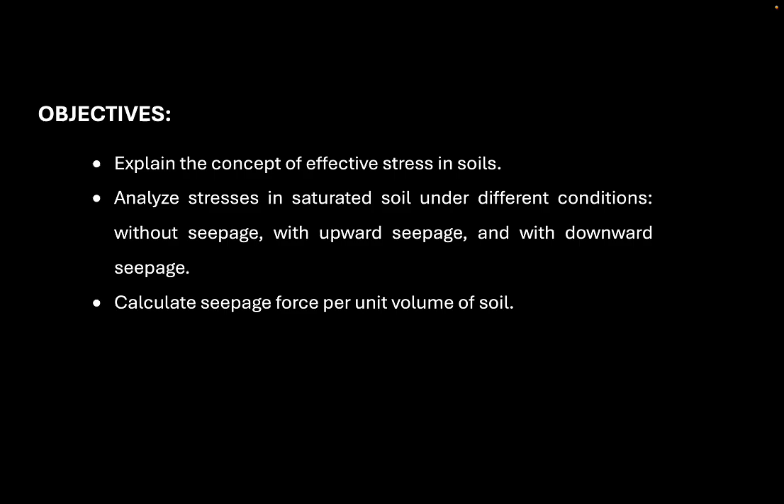Before we proceed with our discussion on effective stresses in soil, let's first know the objectives of this lesson. First is to explain the concept of effective stresses in soils. Next is to analyze the stresses in saturated soil under different conditions: without seepage, with upward seepage, and with downward seepage. Lastly, we will discuss the calculation for the seepage force per unit volume of the soil.

So to proceed, let's first define what is effective stress. Effective stress refers to the stress transmitted through the soil skeleton, which directly influences the soil strength and deformation behavior. It is also the measure of the grain-to-grain contact force per unit cross-sectional area of the soil mass.

Later on we'll see the figure illustrating this definition of effective stress as the measurement of grain-to-grain contact force per unit cross-sectional area. Also, it is the portion of the total stress carried by the soil particles, and this controls the soil strength, the settlement, and the stability. So effective stress is part of total stress.

With all this definition in hand, we can define effective stress mathematically as sigma prime equals the total stress sigma minus the neutral stress, also known as the pore water pressure U. Sigma prime is the effective stress in kilopascal, using SI units. Sigma is the total stress, also in kilopascal, and U is the pore water pressure, or neutral stress, also in kilopascal. Later on we will see why pore water pressure is also called neutral stress.

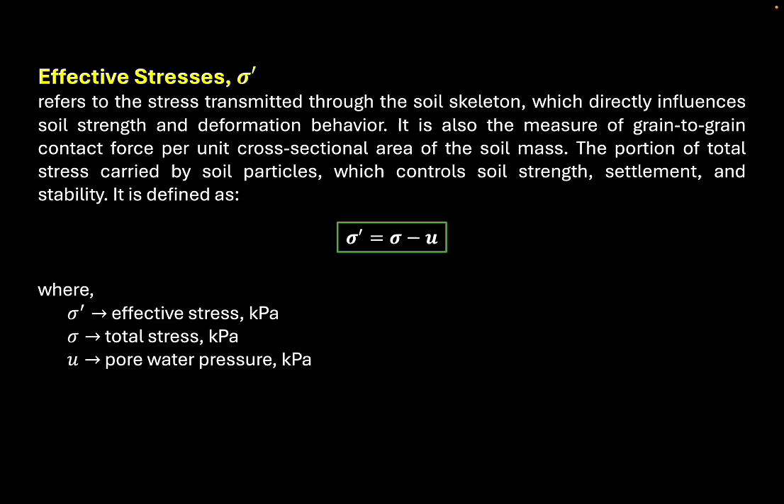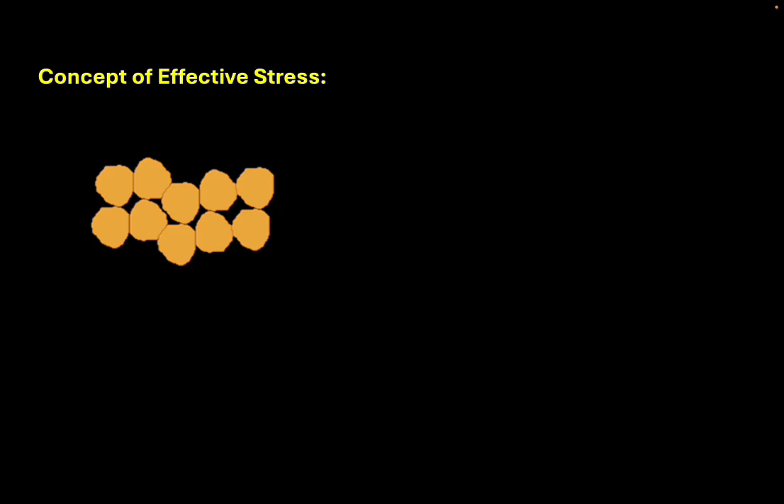For the concept of effective stress, as mentioned, based on our definition, effective stress is the measurement of grain-to-grain contact force per unit cross-sectional area. So we have here grains of soil, and we have the cross-sectional area cut into a section B to B.

If we apply forces P prime on each grain-to-grain contact of the soil, we get this type of effective stress. Each grain has its own area.

If we have a force acting downward, say force W, there are these P primes: P prime 1, P prime 2, P prime 3, P prime 4, P prime 5. This W acts on the topmost layer of our grains in consideration, and it is balanced or neutralized by these P primes from the bottom of our section.

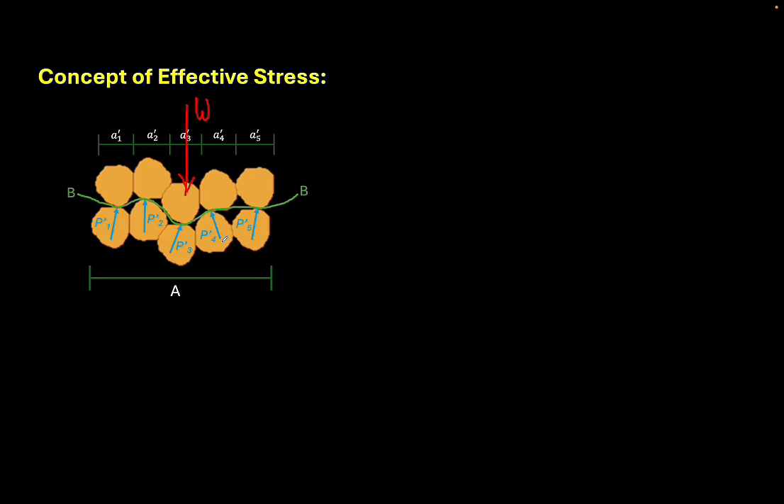We can denote this as our sigma prime, and we know from strength of materials that stress is equal to force over area. We already learned this formula for stress back in second year — it is just force over area.

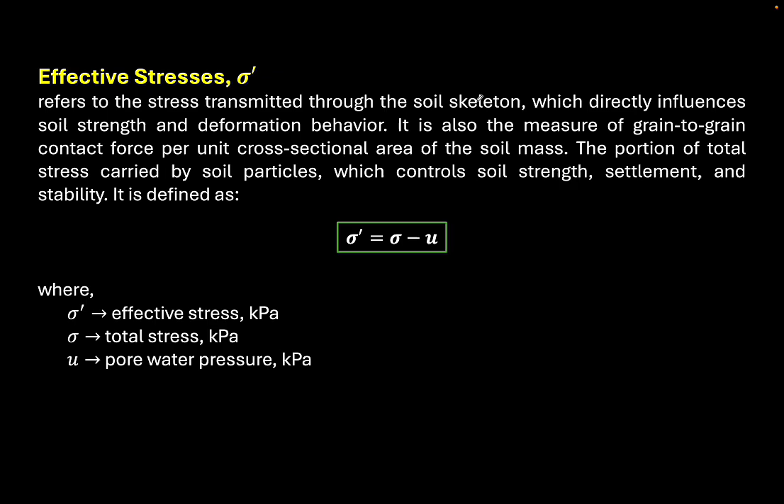Therefore we can denote sigma prime, or the effective stress, as the summation of all P primes over the unit area. That's why it matches the definition of effective stress as the grain-to-grain contact force per unit cross-sectional area — it is simply P over A.

This summation of P primes we can simply denote as P prime, or the effective force, all over the cross-sectional area. So P prime is the summation of all P primes, where i equals 1 and i is the number of contacts, and P prime acts over the grain-to-grain contact area.

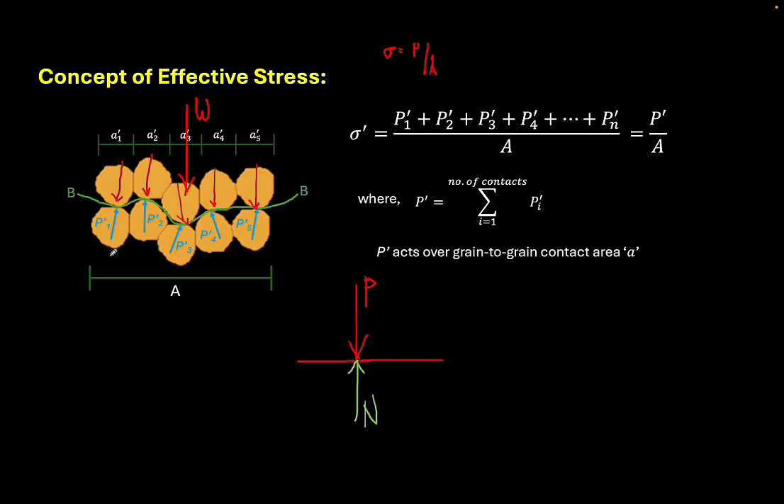It acts the same as this P prime here. So we have a force pushing down. Of course, there's a normal force that counteracts that, in which case our normal force will be P prime, okay?

So we have here an example of a water table on top and a soil column on the bottom. Our section is a B to B section. This is that section. This is our water table, and this is our soil column.

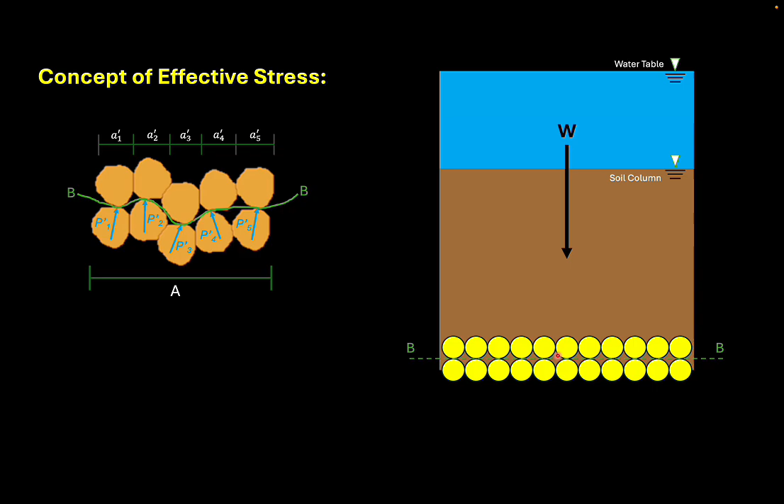Of course, in our water table, due to gravity and the weight itself—weight of the water, weight of the soil—collectively we can denote this as W. There's pressure or weight coming from our water table, and also pressure coming from our soil. And on this section, the B to B section, there's also an acting or reacting force, which is force P. So we have W.

We don't know exactly what that W is—it might be the weight of the water table, the weight of the soil, or any combination. There's also buoyancy. So we have a reacting force P to counteract that W, and that P has two parts.

First is the grain-to-grain contact force, which we discussed a while ago, that is the P prime. And another part is the buoyant force, denoted as capital U. Again, force P consists of two parts: the grain-to-grain contact force P prime and the buoyant force, capital U.

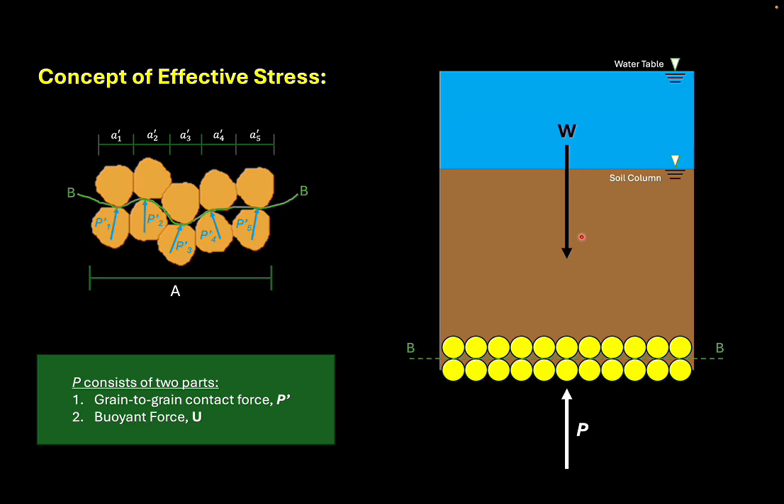Those voids, based on our soil mechanics—if the soil is dry, there's nothing inside the voids, just air. But if it's moist, there's water inside. If it's saturated, it's fully saturated with water.

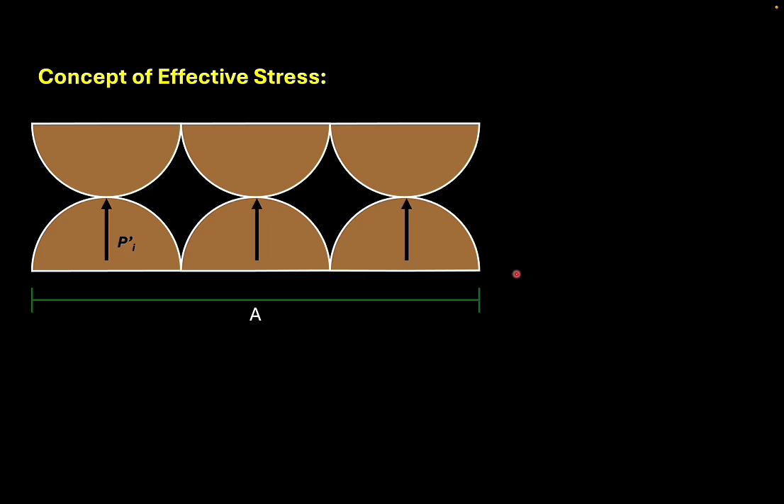Again, we have a contact force P prime along the cross-sectional area. Now let's discuss what buoyant force is, denoted as capital U. This buoyant force acts over the area of grains not in contact with each other.

That means these voids have no contact with other grains of soil. So that's where our buoyant force, capital U, is located.

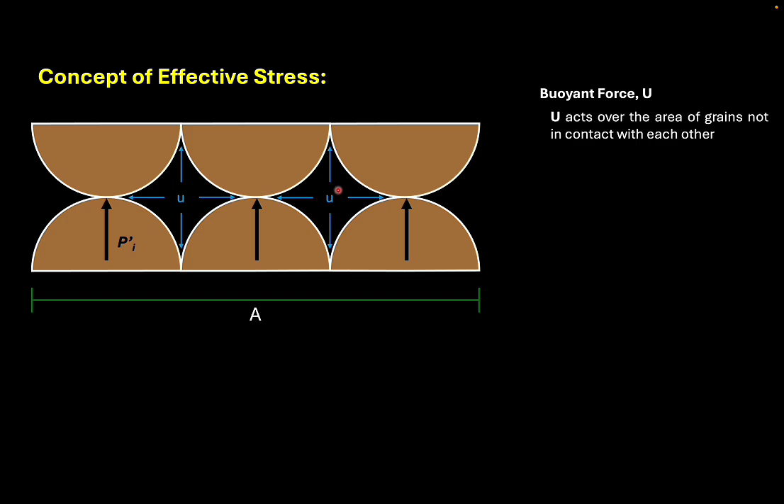But if we zoom in further on our buoyant force, we have internal forces—small forces there. That force is denoted as small u, and that small u is what we call the pore water pressure or the neutral stress.

Neutral stress—why neutral stress? We have contact forces between the grains of soil. What the neutral stress or pore water pressure does now is neutralize those grains of soil.

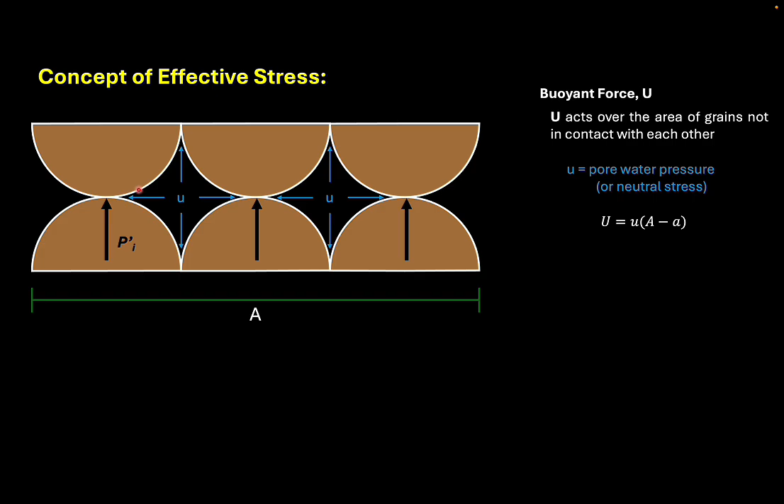So now let's discuss the effective stress equation. How was our formula for effective stress derived?

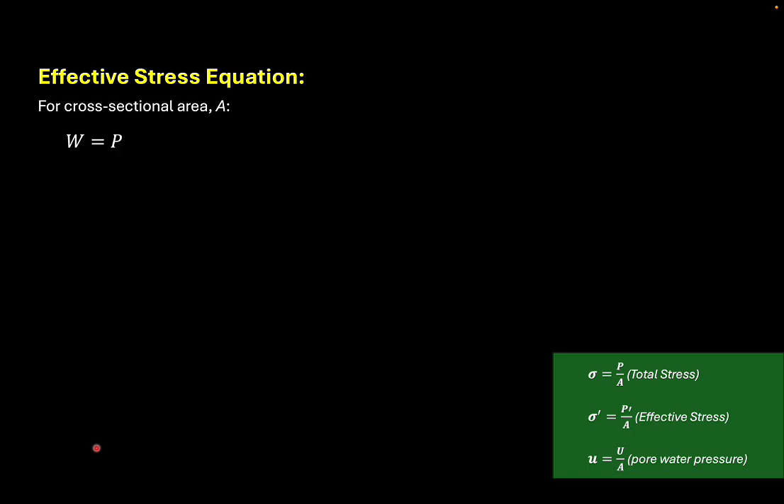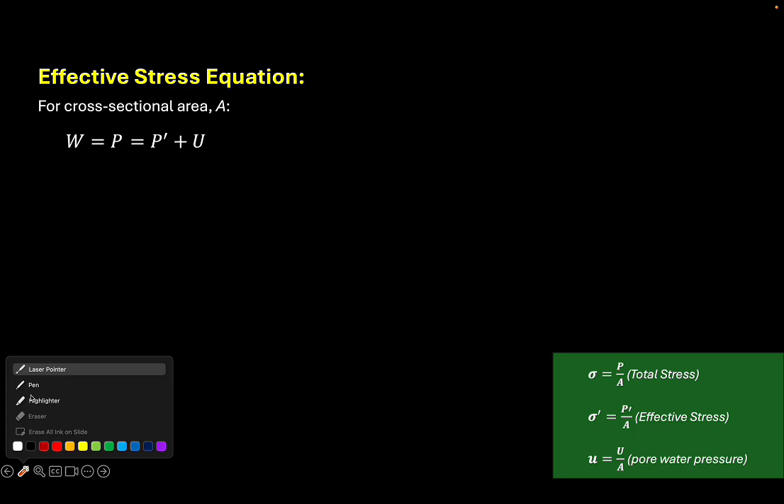From our cross-sectional area, denoted as capital A, we have W is equal to P, or weight is equal to the total force. That total force is also written as P prime, or the effective force, plus the buoyant force. Based from our discussion earlier, let's say we have a soil column, with a force going down, which is W, and a force going up, which is P. Therefore, W is equal to P, and this P can be written as P prime or the effective force plus the buoyant force.

If we divide all sides by the cross-sectional area, we become familiar with the equations we're forming. We can denote P over A, or the force over the area, as the total stress. In soil, sigma is total stress. Algebraically, this becomes P prime over A. Since P prime is the effective force, our sigma here, or stress, will be the effective stress, plus this, which is U over A.

Earlier we said the formula for the buoyant force, capital U, is equal to the pore water pressure, small u, times the area, minus the grain to grain area. That's our formula. So we substitute it, still divided by A since we divide all sides by the cross-sectional area. Algebraically, we can write this as: the total stress is equal to the effective stress plus the pore water pressure times 1 minus grain to grain area, all over the cross-sectional area of soil.

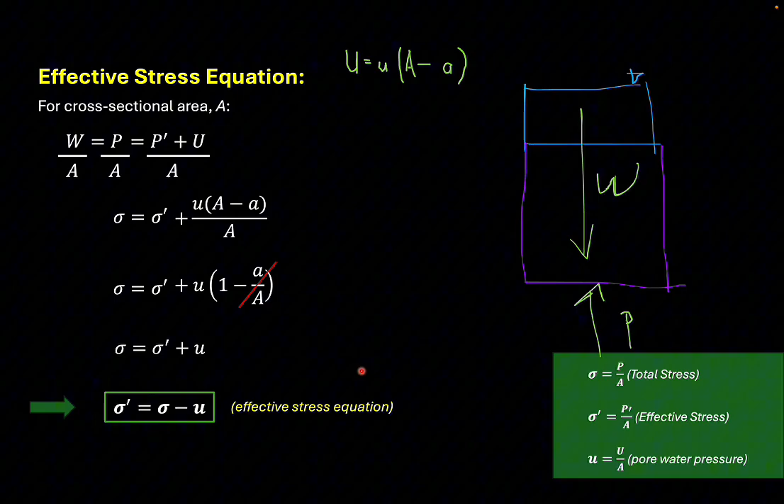So therefore, this will be the equation for our stresses. We have the total stress is equal to the effective stress plus the neutral stress. Rewriting this, we have the effective stress is equal to the total stress minus the pore water pressure, or the neutral stress. This will be our general equation for the effective stress. So now we all know the formula for the effective stress.

Let's use that equation on the following conditions. Based on our objectives, we need to know the effective stress in three conditions: no seepage, upward seepage, and downward seepage. So the first condition is the effective stress with no seepage.

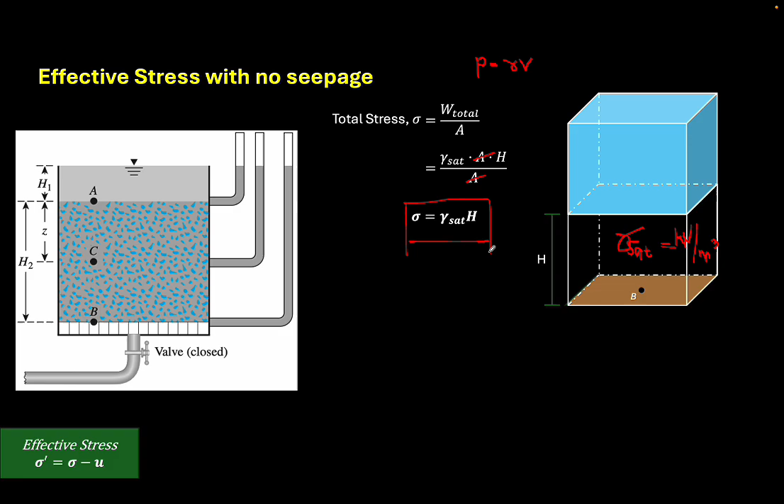Let's now proceed to getting the formulas for effective stress with no seepage. So first, total stress. The one we consider first is point A. If we consider point A, we also need to consider the soil or water above point A. In this case, at point A, what's above it is water - let's consider that, H2O, water.

So water is what we consider at point A. Isn't total stress equal to gamma sat times the depth? No problem, we have the depth. Do we have gamma sat here? At that point, again, there's no soil there. You only get gamma sat if you have soil above. Since this is purely water table at the height of H sub 1...

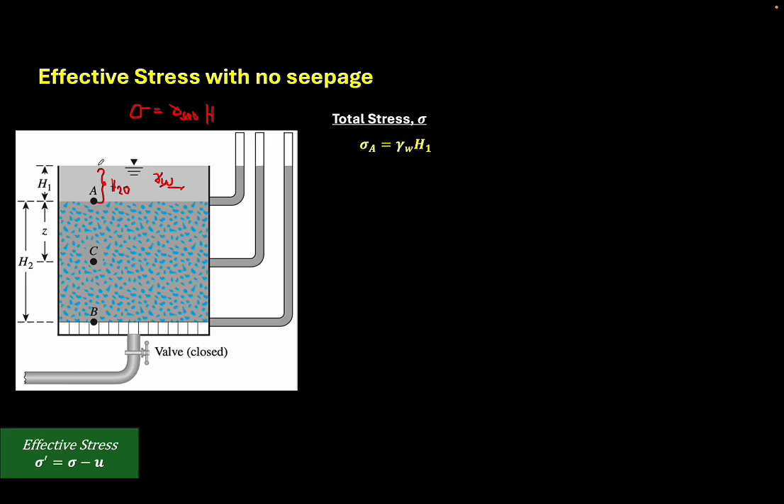...therefore we can get the total stress at point A as gamma W, or gamma of water, not gamma sat. Gamma water is what we consider at point A, because what's above it is water. So gamma water multiplied by H sub 1, or the height or depth of the water. Again, the total stress at point A, since water is above it, will be gamma W or the unit weight of water times H sub 1.

Now let's go to point B. At point B, how many types do we consider? We have two types in consideration: H sub 1 or layer 1 as the water, and layer 2 as the soil. In this case, the water table is above, above our soil. So therefore we can say that our soil below is fully saturated, so what we use here will be gamma sat, or the saturated unit weight.

Always remember that: when the water or water table is above, automatically what's below it is saturated soil, so we use the saturated unit weight. Again, effective stress is still stress, so we still use gamma H. Therefore, we can get the total stress at point B as gamma W, or the unit weight of water, times H sub 1 - that's our layer 1 - plus gamma sat, this is layer 2, or the soil layer, times H sub 2.

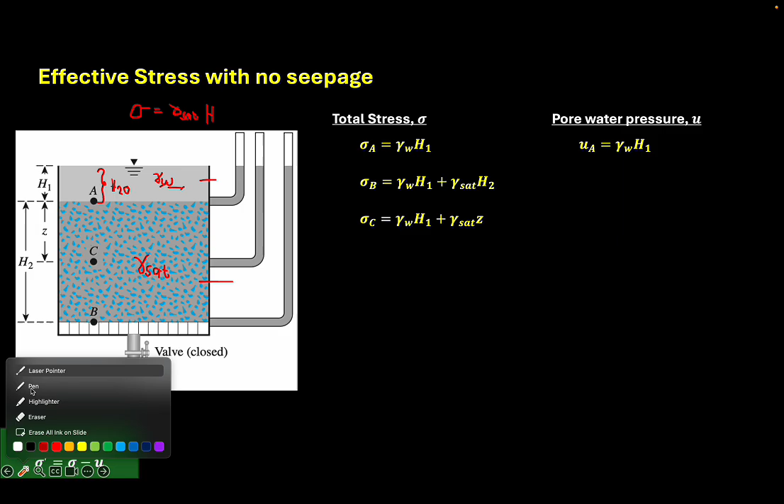How many layers do we consider acting on point B? We'll be considering 2 layers: the first layer of water, and the second layer of saturated soil. But why do we need to include the soil? Again, because our soil is saturated. We have soils that are stuck together, and in between the soils, there is water. That's why it's called saturated soil, even if it's just moist. So there's still water in between. We need to consider that too, unless there's no water inside it. We do have problems like that sometimes.

So if this layer of saturated soil is included, we can also get the pore water pressure inside this soil, since there's water in it. Therefore, UB, or the neutral stress at point B, is equal to gamma W multiplied by the depth H sub 1, plus gamma W, not gamma sat, multiplied by H sub 2. And lastly, point C, UC, is the same: we have gamma W, H sub 1, plus gamma W for the soil, times depth Z. So we have now completed the formulas for total stress and pore water pressure.

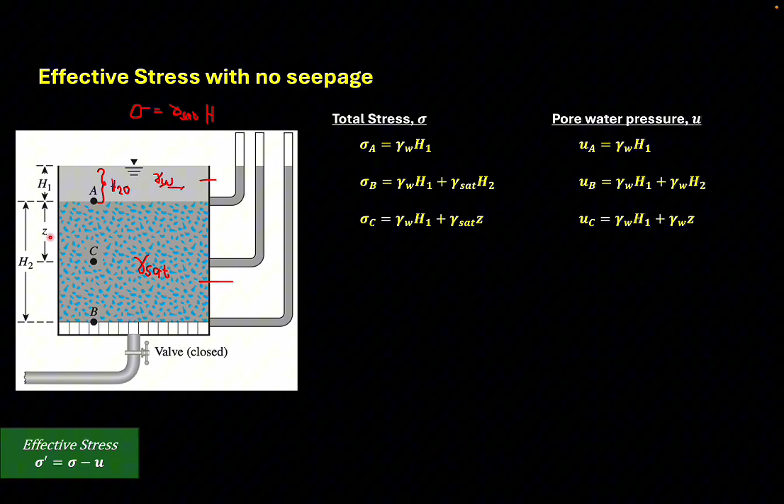So now, for the effective stress, sigma prime. We have here 3 points again: point A, point B, point C. These are the total stresses we calculated earlier, and these are the pore water pressures we calculated earlier. Based on the formula, effective stress sigma prime is equal to sigma minus pore water pressure. So we just need to subtract sigma, or the total stress, minus the pore water pressure. Gamma W H sub 1 minus gamma W H sub 1, of course, that will be 0.

If we subtract the total stress at point B and the pore water pressure at point B, we'll be having this form. We can cancel gamma W H sub 1 on both of our variables—we can cancel that out. So we can now have gamma sat H sub 2 minus gamma W H sub 2.

Labas natin yung H sub 2 since ito yung similar sa dalawang values natin. Labas natin H sub 2, so gamma sat minus gamma W times H sub 2. Very familiar sa atin yung gamma sat minus gamma W.

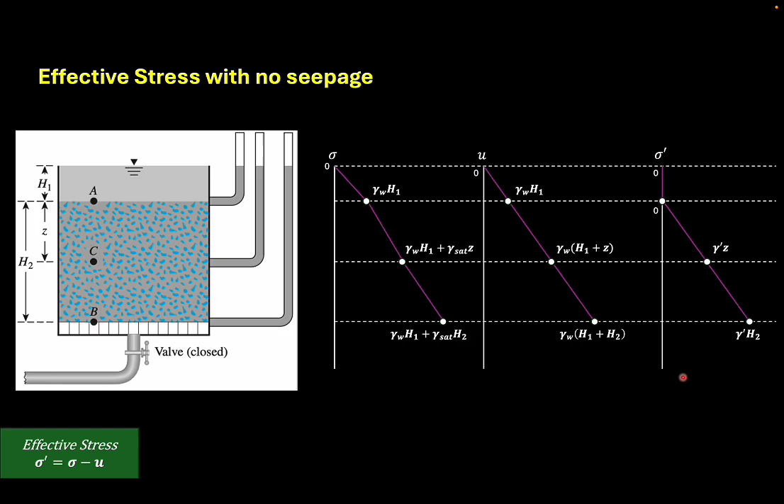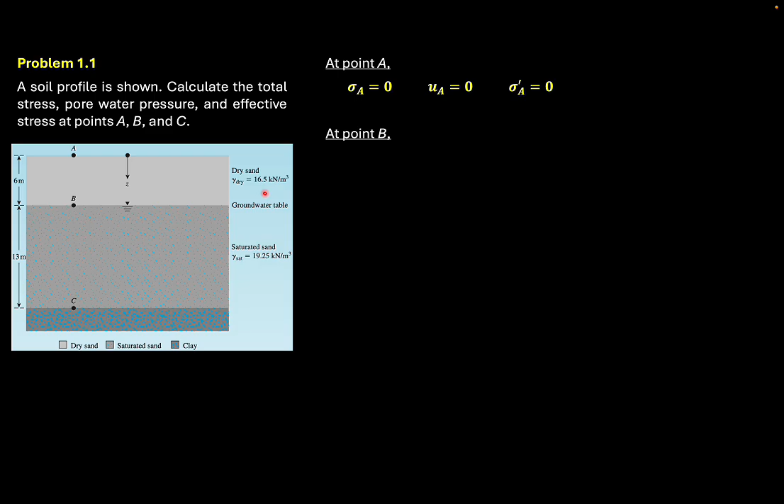So therefore, the total stress at point B is equal to gamma dry, kasi nga dry sand yan. Ang water table natin pala ay nasa ibaba ng dry sand. So, therefore, dry nga talaga yung sand natin dito, multiply by H sub 1.

Substituting the values of gamma D and H sub 1, we have 16.5 kilonewton per cubic meter multiplied by 6 meters. Calculating, we get the total stress at point B as 99 kilopascal.

Pore water pressure at point B. The soil at the top is dry sand. It has no water, no moisture at all inside. So, therefore, the pore water pressure at point B will be equal to 0.

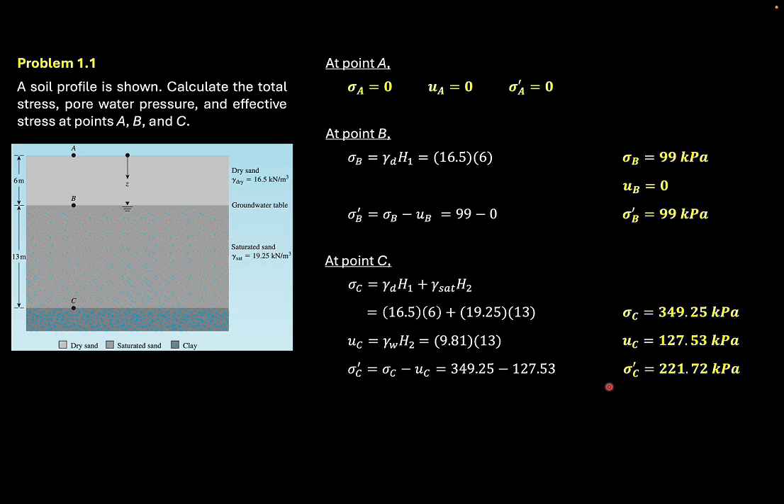So we can now compute for the effective stress at point C, which is the total stress at C minus UC, or the pore water pressure at point C. That will be 349.25 minus 127.53 kilopascals. The effective stress at point C is equal to 221.72 kilopascal. So that is for problem 1.1.

Now, problem 1.2. From the figure at problem 1.1, how high should the water table rise so that the effective stress at point C is 190 kilonewton per square meter? Assume that the gamma saturated is the same for both layers.

So, at a later time, it's possible that the groundwater table rises. We don't know the height that the water table rose. But we're given the effective stress at which the water table rose, which is 190 kilopascal. So, we need to assume that the gamma sat in the risen area and the saturated sand are equal.

So, let's follow the same procedure as before, computing layer by layer. First, let's get the total stress at point C. So, for the first layer, that will be 6 meters minus this H, to get this height.

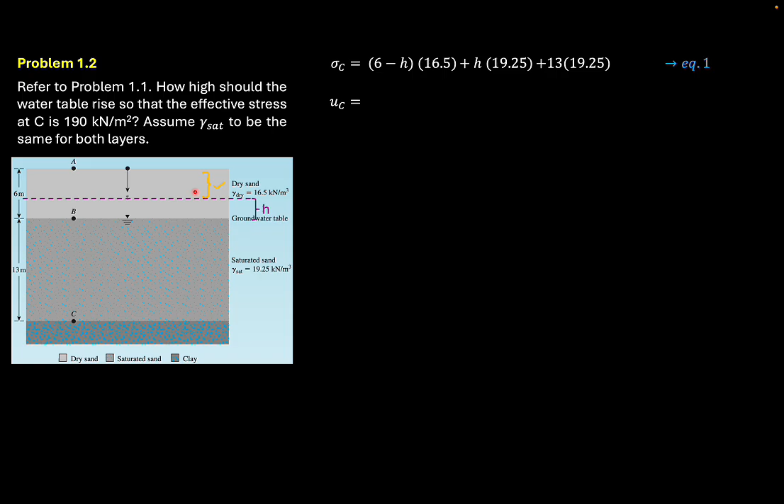At this layer, meron ba tayong gamma of water dyan? The answer is wala, because this is dry sand. Okay, dito sa 6 minus H. So dito tayo mag-i-start ngayon sa H, kasi saturated na ngayon to.

May tubig na ngayon dyan, so therefore that will be H times 9.81, ito yung gamma of water natin, plus the column 13 meters, which is the saturated sand, so that will be 13 times 9.81. And that will be our equation 2.

Again, the required effective stress at point C is equal to 190 kilopascal. And our formula for effective stress at point C is equal to the total stress at point C minus the pore water pressure at point C.

Substituting equations 1 and 2 sa ating working formula, we can have 190 equals equation 1, simplified na to, minus equation 2. So simplifying further, we can have 190 is equal to 99 minus 16.5H plus 19.25H plus 250.25 minus 9.81H minus 127.53.

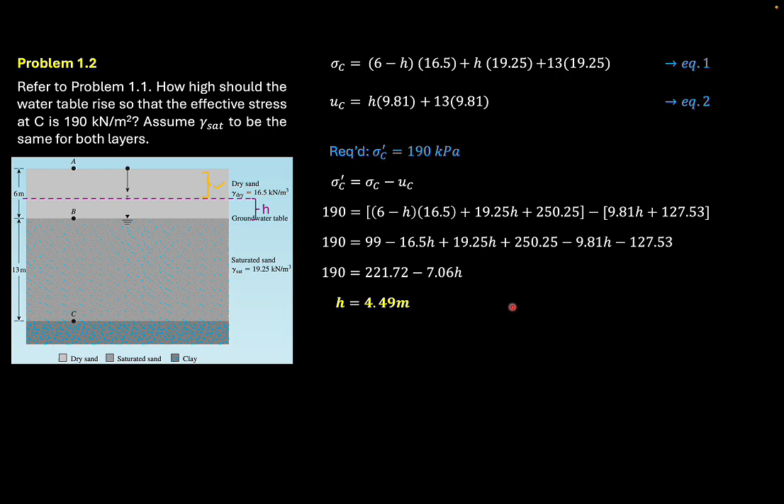Next, effective stress with upward seepage. Ito yung seepage natin, no? Ito yung tank natin, again, 2 layers of water and layer of soil. The soil natin is still saturated soil.

May pipe pa rin tayo dito. Yung pipe natin sa ibaba ngayon ay naka-open, yung valve naka-open siya. Wala naman tumatagas pababa, pero may pumapasok daw na tubig or inflow from the pipe paakyat ng soil sample natin. Okay, that's why itong force na to, ito yung upward seepage.

Galing daw sa baba yung tubig, pataas daw siya. Ang tendency ngayon ng tubig natin sa water table natin ay mag-overflow. So that's the problem with upward seepage, no?

May inflow ka galing sa ilalim, so pinupush niya pataas yung tubig, kailangan may kawalan yung tubig, kailangan niya makapasok doon sa water table. Pero ang water table natin is limited lang yung height at height h sub 1. Mag-overflow ngayon or mag-spill ngayon yung tubig natin sa ating water table.

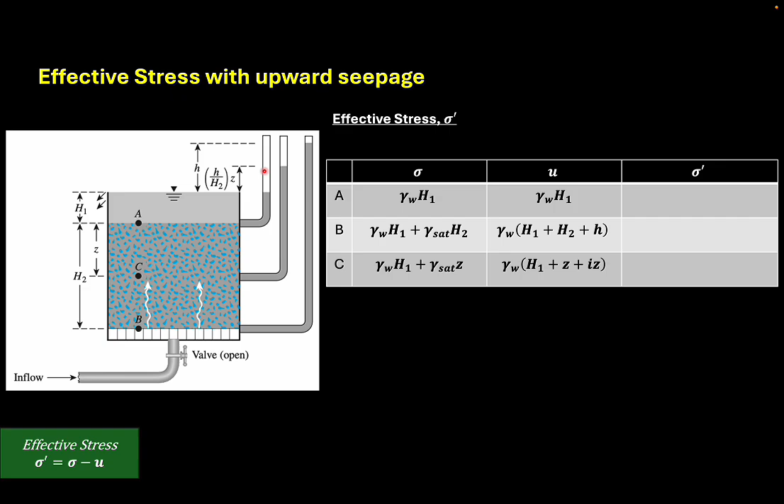Effective stress tayo, same pa rin formula. Effective stress is equal to total stress minus the pore water pressure. So for point A, effective stress at point A is equal to gamma W H sub 1 minus gamma W H sub 1. That will be equal to 0.

Next, at point B, subtracting the total stress at point B and the pore water pressure at point B, we can have this equation. Okay, cancel yung gamma W H sub 1. We can have gamma sat H sub 2 minus gamma W H sub 2 minus gamma W times H. Simplifying, again we have gamma sat minus gamma W, we can change it as gamma prime. The effective stress at point B will be gamma prime H sub 2 minus gamma W times H.

Lastly, effective stress at point C. Subtracting total stress at point C by the pore water pressure at point C. Cancel din yung gamma W H sub 1. We can have this equation: gamma sat Z minus gamma W Z minus gamma W I Z. Again, we have gamma sat minus gamma W, gamma prime yon. So therefore, we can have gamma prime Z minus gamma W I Z.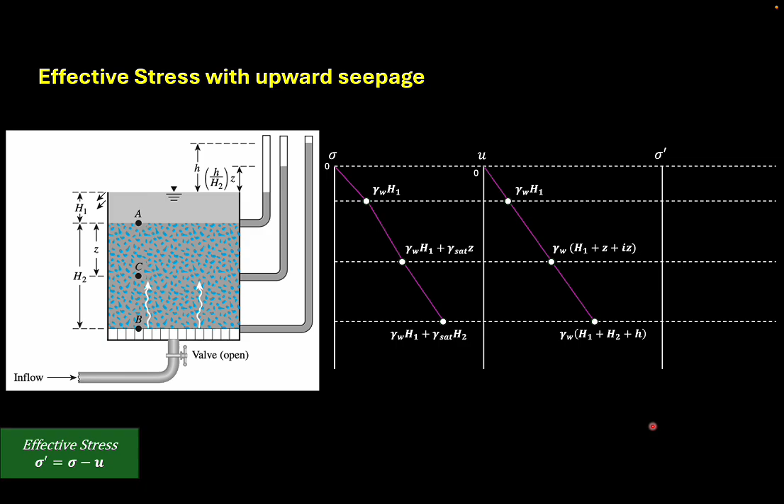Okay, so these are the procedures for the effective stress with upward seepage. If we plot our stresses, we can have this one for the total stress, for the pore water pressure, and for the effective stress.

Another principle is what we call the quick or boiling condition. If the rate of seepage and the hydraulic gradient gradually increase, a limiting condition will be reached, at which point our total stress, the effective stress, which we know is equal to gamma prime Z, kung i-consider natin ay yung point C, gamma prime Z minus gamma W I Z, yung hydraulic gradient natin will now be the critical hydraulic gradient, magiging ICR na siya, or I critical. And that effective stress at point C, or point of consideration, will be equal to 0. Again, if we are considering the critical hydraulic gradient, effective stress must be equal to 0.

Now, the ICR, or the critical hydraulic gradient, has this formula: I sub CR is equal to gamma prime all over gamma W. Again, critical hydraulic gradient is equal to the submerged unit weight, or gamma prime, all over the unit weight of the water. For most soils, the critical hydraulic gradient varies from 0.9 to 1.1, with an average of 1.

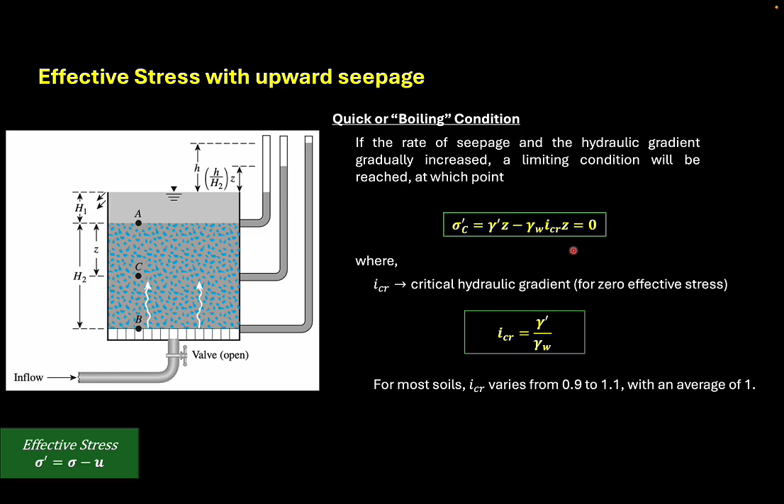Usually 1. So for example, for upward seepage and also boiling condition: Problem 1.3. A 9-meter thick layer of stiff saturated clay is underlain by a layer of sand. The sand is under artesian pressure. Calculate the maximum depth of cut H, itong H na to, that can be made in the clay.

Again, a 9-meter thick layer of stiff saturated clay is underlain by a layer of sand. The sand is under artesian pressure. Calculate the maximum depth of cut H that can be made in the clay. We cut down, but we don't know up to where. We cut it to its maximum depth where it won't fail, where it won't heave.

Now, how do we compute this problem? Let's get the total stress or the stresses at point A. The total stress at point A is equal to, since this is saturated soil, gamma sat multiplied by the height. What height will we use? Of course, 9 minus H, since that's where it is.

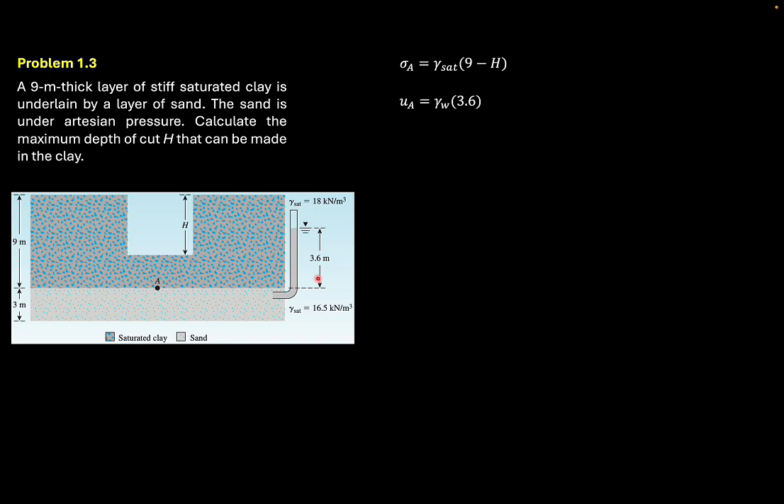So, the UA, or the pore pressure at point A, is equal to gamma W times 3.6. We are just considering the standpipe here.

For heave to occur, meaning the ground mounds or bulges up, for heaving to occur, the effective stress at point A must be equal to 0. This is the quick condition or the boiling condition.

So we have this effective stress formula. Substituting the values, we have 0, because we need heave to occur to get the maximum depth of cut. So we have the total stress at point A, then the pore water pressure at point A.

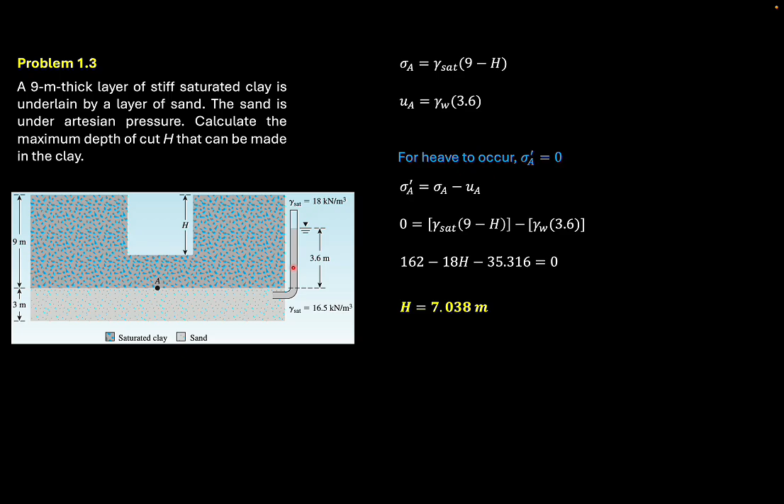Substituting the values of gamma sat and gamma W, we get 162 minus 18H minus 35.316. Using your calculator, we can compute for the value of H, or the maximum depth of cut. We get H is equal to 7.038 meters.

Next, problem 1.4. A cut is made in a stiff saturated clay that is underlain by a layer of sand. What should be the height of the water H in the cut so that the stability of the saturated clay is not lost? So there's a cut in our saturated clay, and we have water here. What will be the height of water so that the stability of the saturated clay is not lost? Let's maximize the H of the water so that the stability of the saturated clay is not lost.

At point A, the point we are considering, let's list all the stresses. First, the total stress. Our total stress there is 7 minus 5, this height. This is the height we are considering, times gamma sat, which is 19 kN per cubic meter.

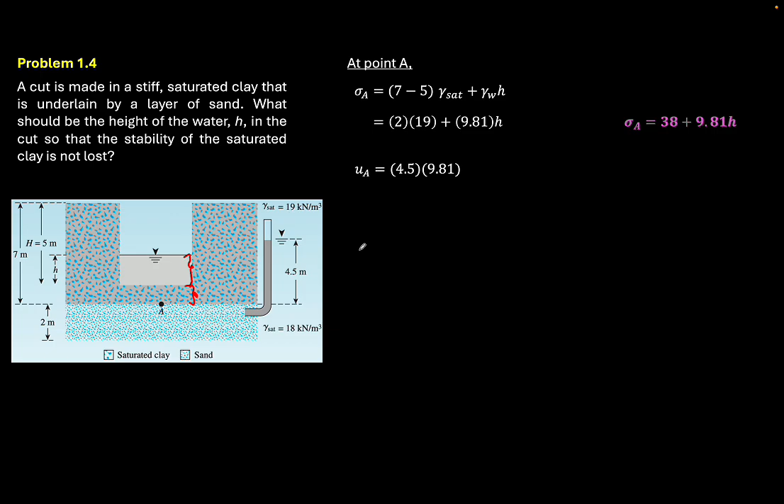Now for UA, let's just look at the standpipe. That will be 4.5 times 9.81. UA is equal to 44.145 kilo Pascal.

For the loss of stability, let's maximize the saturated clay. Therefore, the effective stress of the saturated clay must be equal to 0 at point A. So, 0 is equal to the total stress at point A minus the pore water pressure at point A. Substituting our equations and values, we have 38 plus 9.81H minus 44.145 equal to 0.

We maximize it for the loss of stability. Using your calculator, we can compute for the value of H as 0.626 meters. Almost half a meter is how much the water can rise. If you go beyond 0.626 meters, the integrity or stability of the saturated clay itself will be lost.

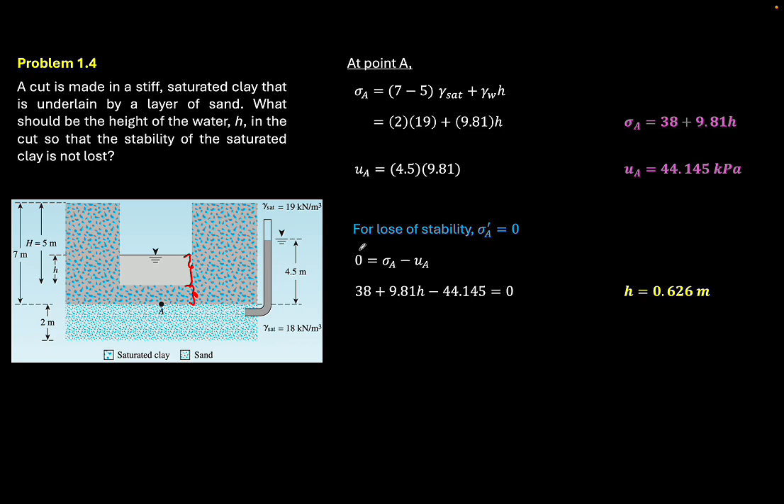That is problem 1.4. Now, for the effective stress with downward seepage, again we have a tank with layers of the water table and the soil mass. This time, our inflow comes from the top. Earlier, our inflow came from below, pushing the water pressure upward, causing upward seepage. Now, the water overflows from the top. Our inflow, the addition of water, comes from the top, seeping downward. Of course, our water needs an outlet, so it won't overflow from the top. The overflow now goes into our pipe.

Since bukas ang valve natin, dito na siya mag-outflow. Again, from the inflow, papasok siya dito sa ating, dadagdag siya sa water table. Yung nadagdag sa water table, magsisip pass through sa ating soil, pababa. Since bukas yung valve natin sa ating pipe, lalabas dyan yung tubig na difference na pinasok mo, tsaka yun na naging steady na water dito. Lalabas siya, yun na magiging outflow natin.

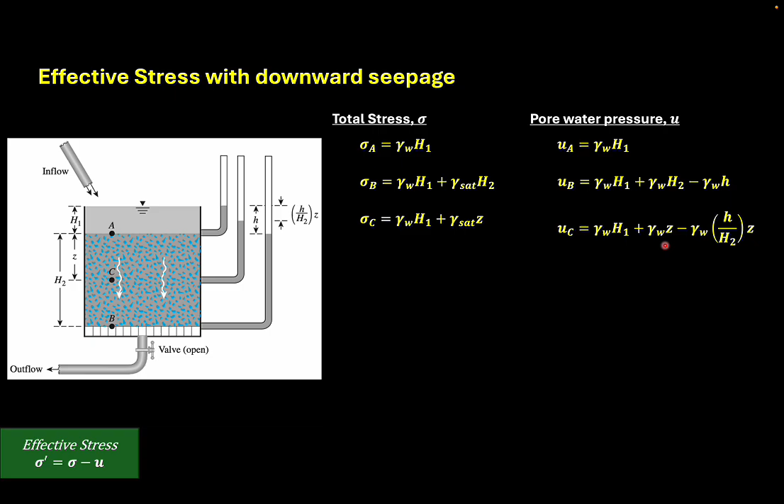And then, we have UC. Same lang din, pero ito lang din pinagkaiba niya. And we know that H over H sub 2 is the hydraulic gradient. Substituting, we have this one. Same process lang din naman, nagkaiba lang tayo sa sign. Again, pag upward ang seepage natin, nagpa-positive tayo dito. Pag downward yung seepage natin, nagne-negative yung value natin dito.

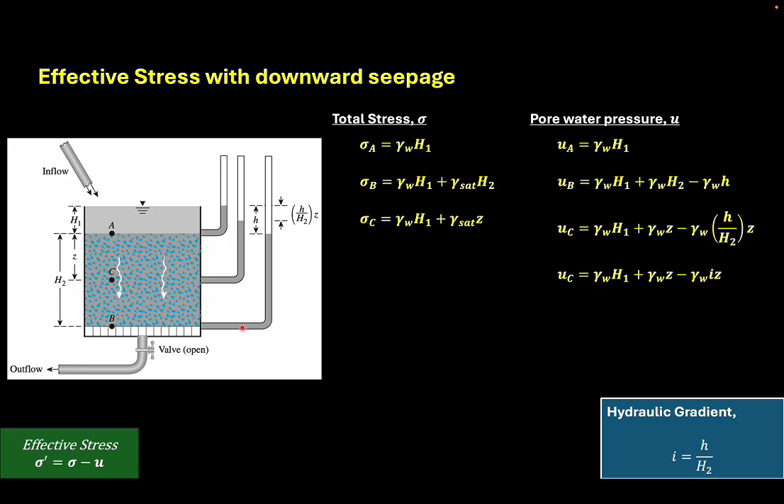So, for the effective stress, same lang din naman. Zero pa din siya sa point A. Sa point B, ito ngayon, we have gamma prime H sub 2 plus gamma W H. And for the effective stress at point C, we can have gamma prime Z plus gamma W IZ. If we plot the effective stresses or the stresses with downward seepage, ito yung magiging itsura niya.

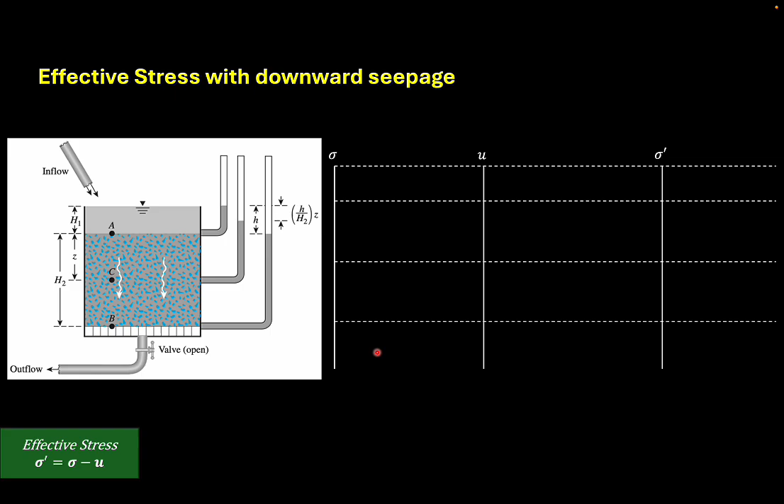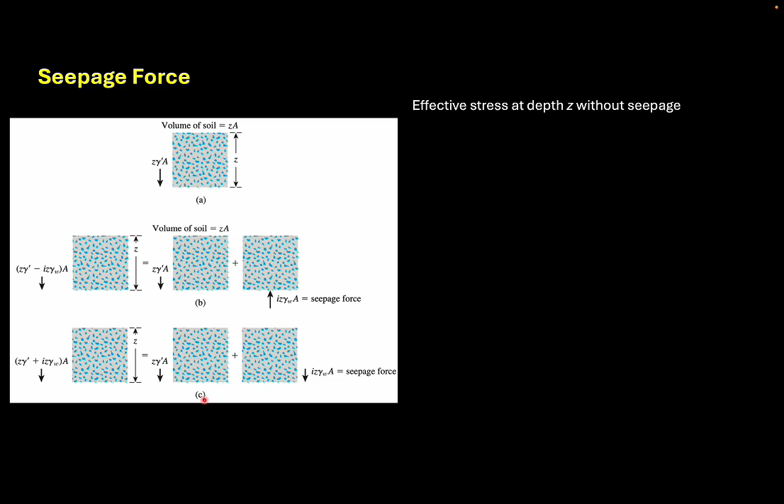So, the effective stress at depth Z without seepage will be sigma prime is equal to gamma prime times Z. If we multiply both sides by the cross-sectional area of the soil, diba, ito ay P prime over A. So, makakancel yon. So, we can now have P prime is equal to gamma prime times Z times A.

Now, due to upward seepage, consider natin ito. So, we have P sub 2, or P prime sub 2, is equal to gamma prime times Z minus gamma W times IZ times A. And now, the difference or the decrease in the total force due to the upward pressure will be P prime sub 1 minus P prime sub 2.

So, if we do the calculation, we can have the gamma W times I, or the hydraulic gradient, times the depth Z times the cross-sectional area, and the seepage force per unit volume. So, if we divide both sides by A... okay, so this is the seepage force per unit volume. We can have I gamma W. Sorry, this is volume pala dapat, so dapat Z to, AZ. So, makakancel yung A, makakancel yung Z. I gamma W. So, that is the seepage force.

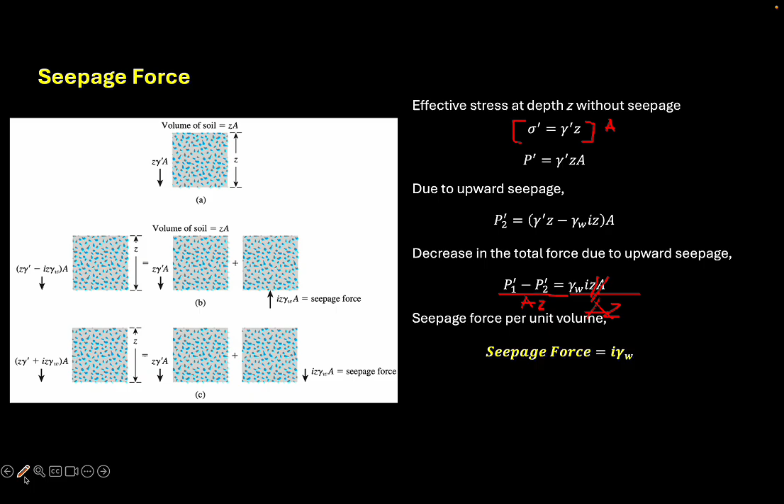Okay, so for problem 1.5, let's consider the upward flow, upward seepage of water through a layer of sand in a tank as shown. For the sand, the following are given: the void ratio, or E, is equal to 0.52, and the specific gravity of solids is 2.67.

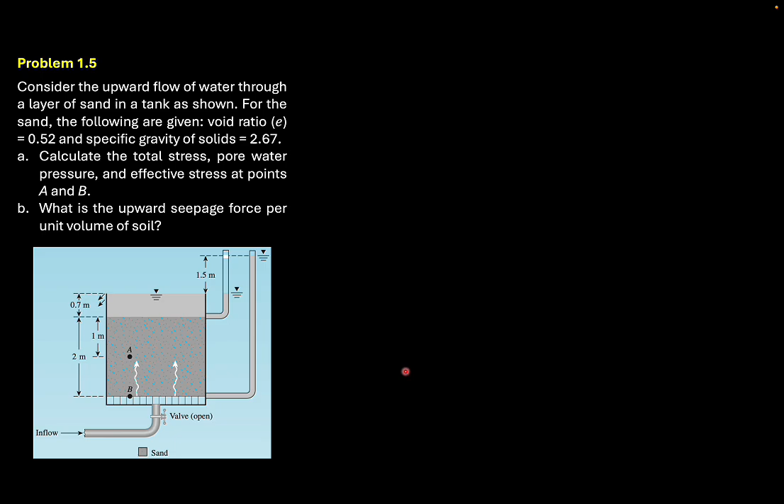Letter A: calculate the total stress, the pore water pressure, and the effective stress at points A and B. And letter B: what is the upward seepage force per unit volume of soil. Okay, so letter A, calculate the total stress, pore water pressure, and effective stress at points A and B.

Given to us is the void ratio of the sand, which is 0.52, and the specific gravity of sand, which is 2.67. The unit weights were not given, but that's what we need. So let's find the unit weights first.

We only have sand as the soil here. Since the water table is above the soil, the sand is already saturated. Fully saturated, in fact. So the unit weight to be considered for the sand area is the saturated unit weight.

From soil mechanics, the formula is: gamma sat equals (GS plus E) times gamma W, all over 1 plus E. Substituting the values of specific gravity and void ratio, we get (2.67 plus 0.52) times 9.81, all over 1 plus 0.52. Our gamma sat is equal to 20.588 kilonewtons per cubic meter.

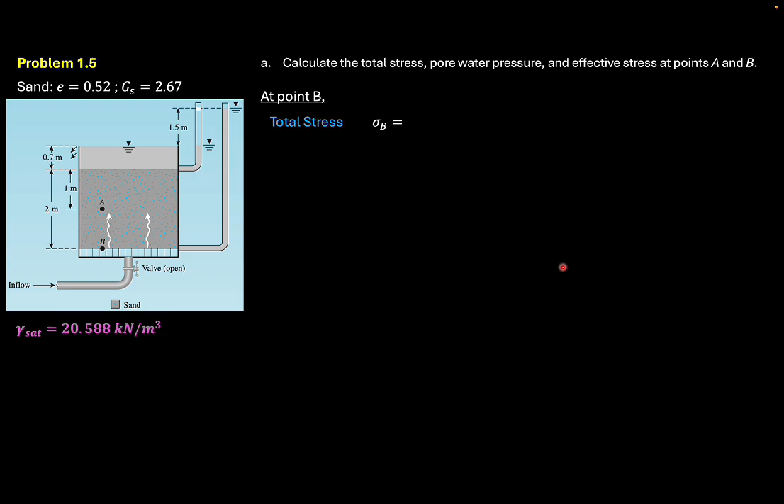Okay, so at point B, here's our gamma sat, already computed. The total stress for point B is equal to gamma W times 0.7, the water, plus gamma sat, going down to 2 meters. Substituting the values, the total stress at point B is equal to 48.043 kilopascal.

For the pore water pressure, U sub B, we still have the same layers to consider: the water, the saturated sand, and the standpipe. So gamma W times 0.7, plus gamma W times 2, plus gamma W times 1.5. Substituting values, we get U sub B as 41.202 kilopascal.

For the effective stress at point B, that will be total stress at point B minus the pore water pressure at point B. Substituting the values, the effective stress at point B is 6.841 kilopascal.

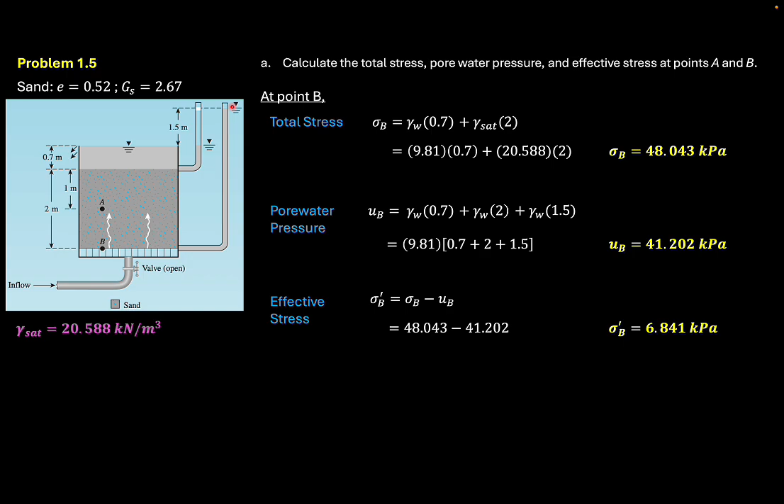And lastly, for letter B: what is the upward seepage force per unit volume of soil. For the seepage force, let's denote it as SF, equal to the hydraulic gradient times gamma W. We know the hydraulic gradient is H over H sub 2, so that's 1.5 over 2 times 9.81. The seepage force will be 7.358 kilonewton per cubic meter.

And that is for problem 1.5.

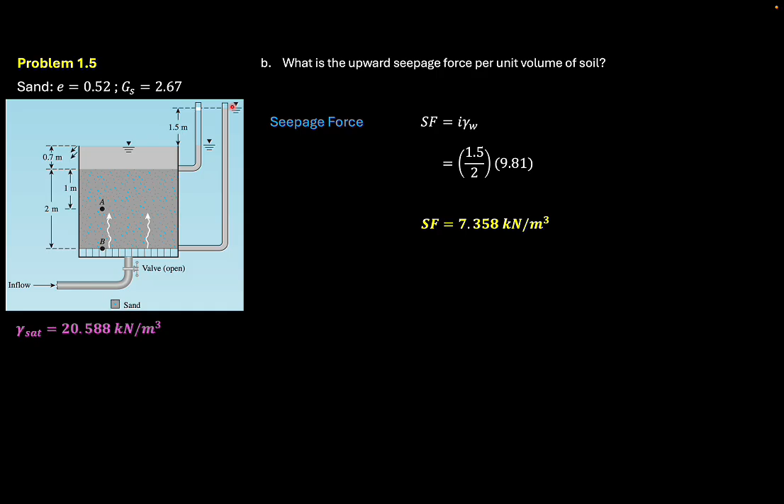So for the next topic, we have capillary rise in soils. This is also important, because there are times when water is underneath, and the soil can get cracked or holed, and the water comes in through there.

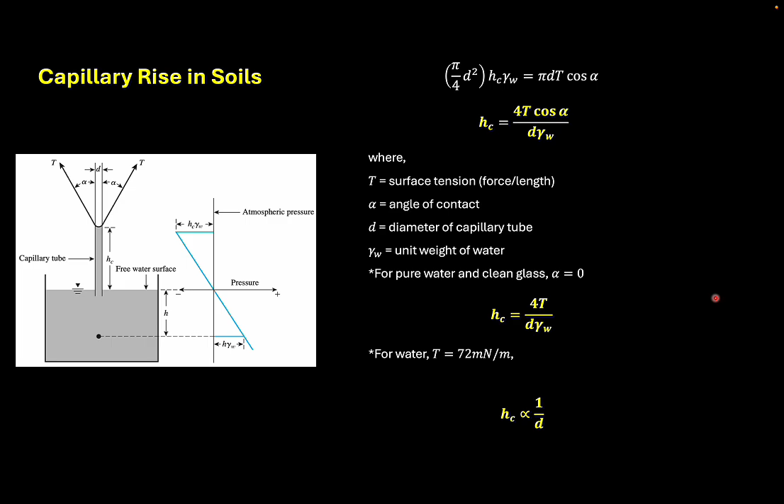So that becomes wet soil. These are the equations for capillary rise in soils, but we are only up to this point.

So in terms of soil, we still use this. At a given degree of saturation, we have H sub 1, and the formula: H sub 1 in mm is equal to C over e times D10. D10 is the effective size after sieving in mm, e is the void ratio, and C is a constant that varies from 10 to 50 millimeters squared. We can use that formula.

Also, to classify the soil type, here are the ranges of capillary rise in meters. For coarse sand, it's between 0.1 to 0.2 meters. For fine sand, 0.3 to 1.2. Silt is 0.75 to 7.5. And clay is 7.5 to 23.

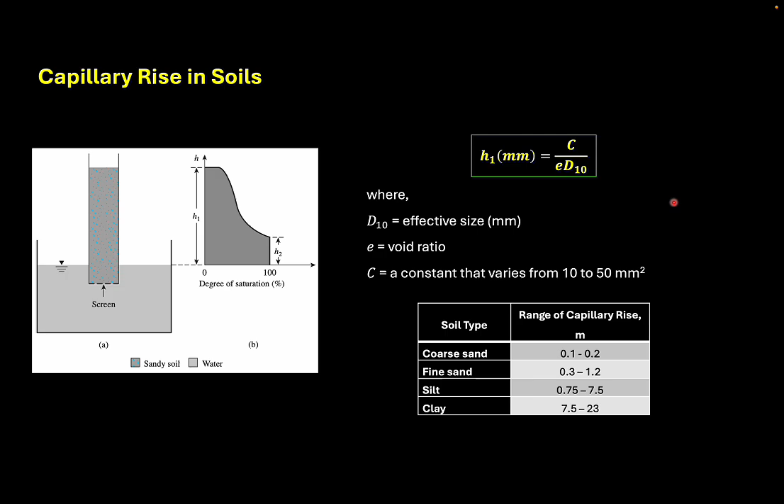For the effective stress in the zone of capillary rise, the pore water pressure at a point in a layer of soil is partially saturated, caused by capillary action. We use U equals negative S over 100 times gamma W times H, where U is the pore water pressure of the partially saturated soil caused by capillary action, S is the degree of saturation, gamma W is the unit weight of water, and H is the capillary rise.

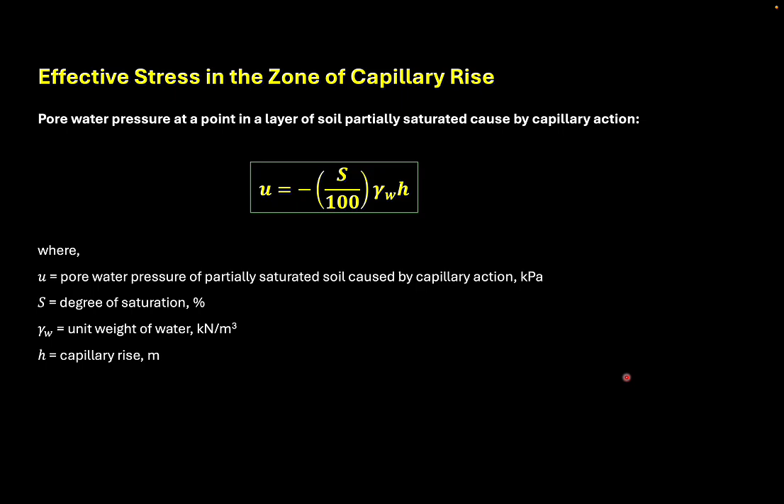So let's use this in a problem. For problem 1.6, a soil profile is shown. Given that H sub 1 is equal to 1.83 meters, H sub 2 is equal to 0.91 meters, and H sub 3 is 1.83 meters, plot the variation of the total stress, the neutral stress, and the effective stress within the depth.

Given the soil profile, the zone of capillary rise is at depth H sub 2. The depth H sub 1 has a specific gravity of 2.65 and void ratio of 0.5 — that's sand. The zone of capillary rise also has specific gravity 2.65, void ratio 0.5, and degree of saturation 50%. Our groundwater table is located at depth H sub 3, which is also the depth of the saturated clay, having a moisture content of 42% and specific gravity of 2.71. We are asked to plot the variations of total stress, neutral stress, and effective stress.

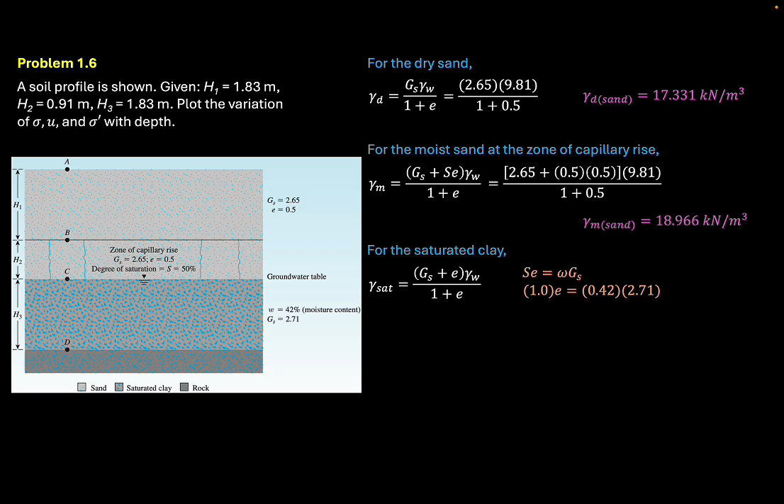Knowing that the saturated degree of saturation is 100% and the moisture content is 42%. Okay, familiar tayo dito sa sewages formula sa soil mechanics. Sewages, SE is equal to WGS. Ito yan, the sewages formula. We know that the clay is fully saturated, so therefore ang S natin will be 1.0 or 100%. E ang hinahanap natin, which is the void ratio. Moisture content is 0.42. The specific gravity is 2.71.

Okay, so now using your calculator we can calculate for the void ratio. The void ratio of the saturated clay is equal to 1.138. So in calculating this, make sure na ang kinukuha nyo is the void ratio of the saturated clay, kasi pag hindi siya saturated clay, magkaka-problem kayo when it comes to gamma sat. Okay, so therefore gamma sat, substituting the values that are available, we can have gamma sat of clay as 17.656 kilonewton per cubic meter.

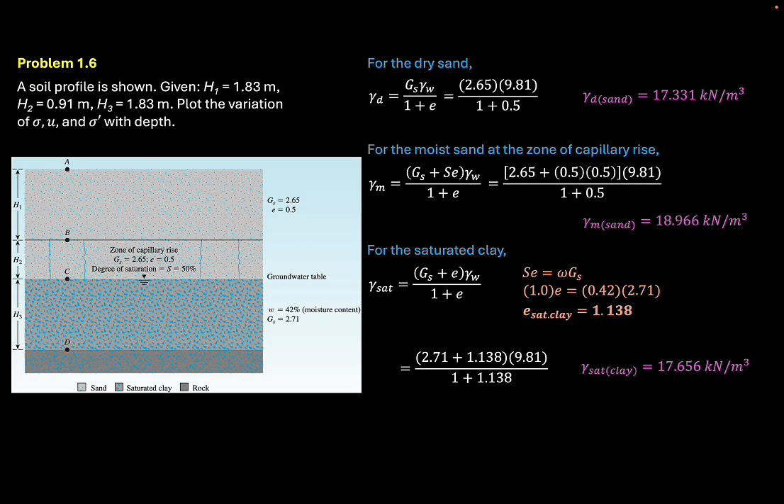So nakuha natin lahat ng unit weights. We can now compute for the total stresses and the neutral stresses. So for the total stress at point A, since wala naman nakapatong sa kanya, kahit ano, so therefore the total stress at point A is equal to 0.

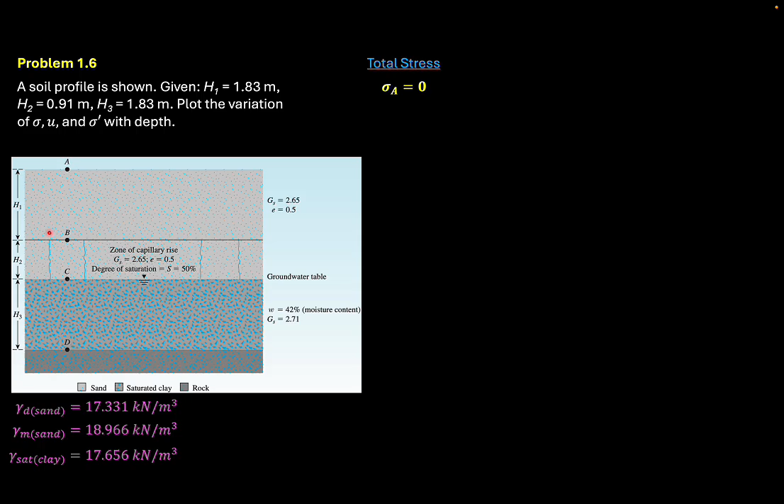Okay, eto na, at point B. Ang nakapatong lang kay point B, ang overburden pressure lang. Pag sabi kong overburden, nakapatong. Overburden pressure lang sa stress B o sa point B ay itong dry sand, so therefore we'll be using gamma dry times the height of 1.83 meters. So that will be 17.331 times 1.83. Therefore, total stress at point B is 31.716 kilopascal.

Next is point C. Ang nakapatong sa kanya, yung dry sand and moist sand. So that will be gamma dry times 1.83 plus itong sa zone of capillary rise, which is gamma moist times 0.91 meters. Substituting the values, we have 17.331 times 1.83 plus 18.966 times 0.91. Therefore, the total stress at point C is equal to 48.975 kilopascals.

And lastly, total stress at point D. Ilan layers na yan? 1, 2, 3 layers na. So we have the overburden pressure from the dry sand, the moist sand, and the saturated clay. Substituting the values, we can have the total stress at point D as 81.285 kilopascals.

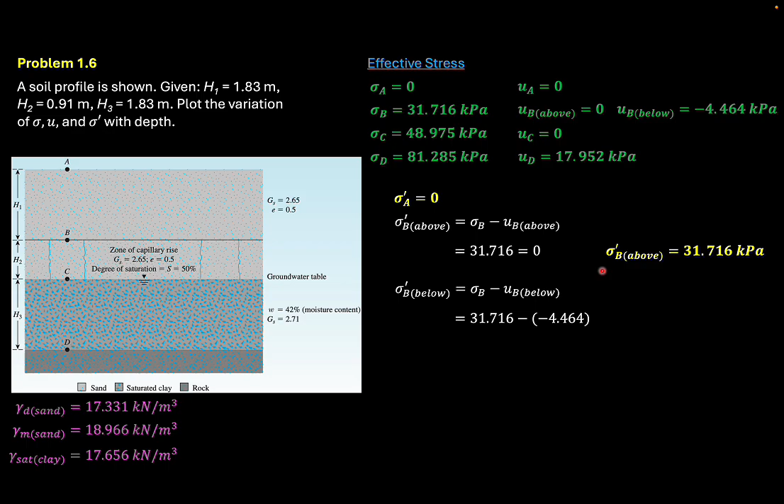Effective stress at point B above equals total stress at B minus pore water pressure at point B above: 31.716 minus 0, equals 31.716 kilopascals. Next, effective stress at point B below equals total stress at B minus pore water pressure at B below. Substituting, 31.716 minus negative 4.464, therefore the effective stress at point B below is 36.18 kilopascals.

Next, the effective stress at point C equals total stress at C minus pore water pressure at C. Substituting the values, 48.975 minus 0, effective stress at C is 48.975 kilopascals.

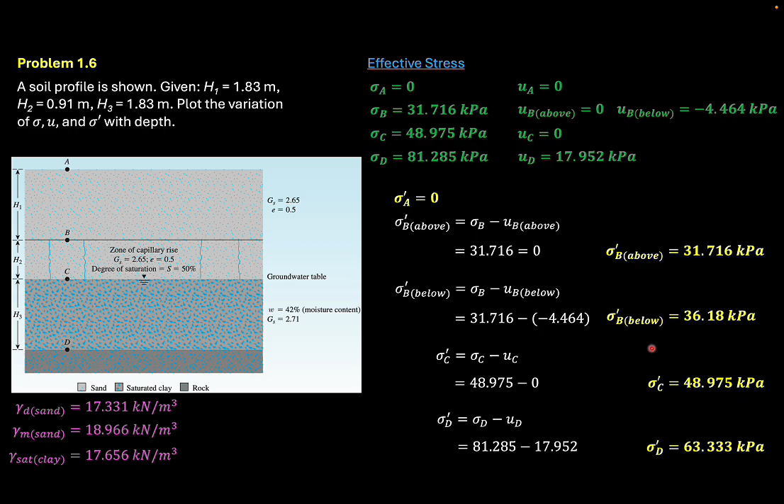Lastly, effective stress at D equals total stress at D minus pore water pressure at D. Substituting, 81.285 minus 17.952, we get the effective stress at D as 63.333 kilopascals. So we have now completed all our stresses: the total stress, the neutral stress, and the effective stress. Now we can plot our stresses.